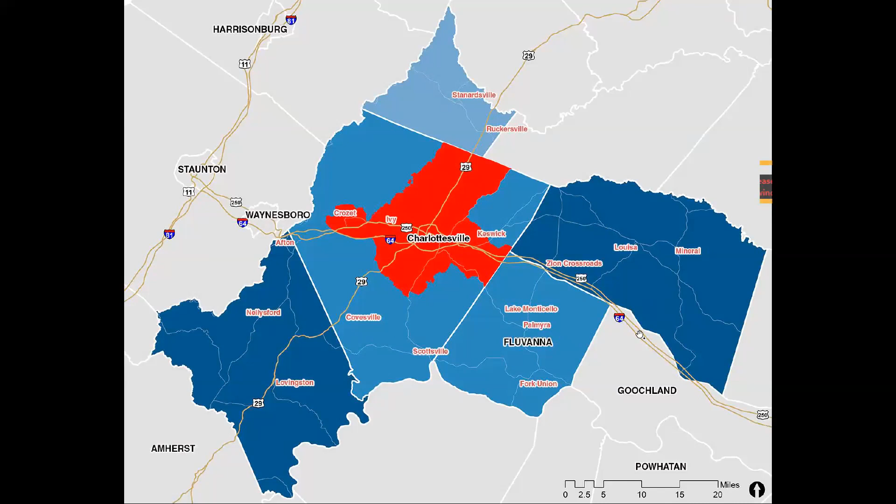All right, go ahead, next slide. Do you see it, Chuck? Not yet. There it is.

Okay, this is the first project. This is a resubmission from last year, our last round of Smart Scale. It's for the conversion of the interchange at Fontaine Avenue and 29 bypass to a divergent diamond interchange, which basically would allow for better operation of that interchange, and it would also accommodate the northbound left turn movement that's currently a yield condition at 64, which has caused a lot of recent crashes in recent years. It would allow that movement to be eliminated and routed through this interchange.

We're looking at this concept right now, and we may make some modifications to it. The district L&D and traffic engineering section are doing some additional work on this project, and we're going to try to reduce some of the costs so that it can be more competitive. It'll be slightly different than what you're seeing in the original concept, but the price is probably still going to be around the same, about $18 to $20 million.

Once we finalize the concept, we will validate and update the cost estimate to reflect the new cost.

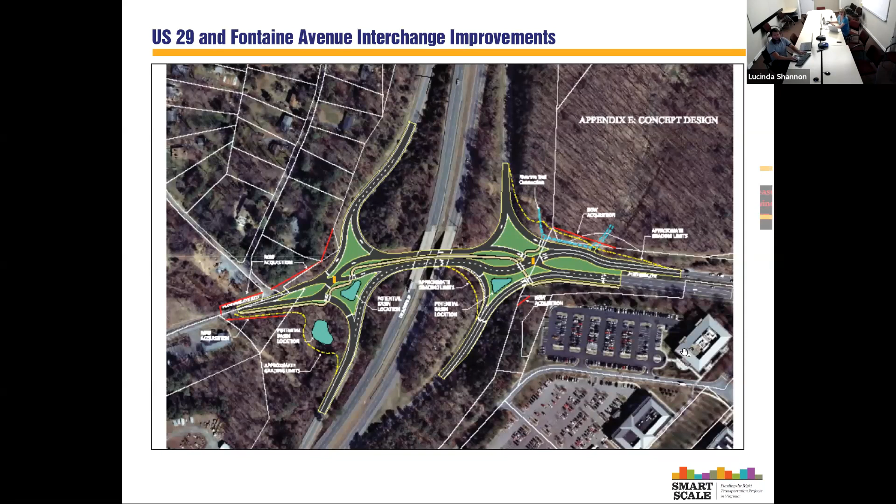Chuck: All right, one of the projects that was part of the Hydraulic 29 panel study was the Hillsdale Extended South project. We came up with some concepts, and this was one they wanted to see how well it would compete. It would extend Hillsdale from the current intersection at Hydraulic down to tie in with the 250 interchange, and it would relocate the westbound ramps to this connection point. It would also include some improvements on Holiday with the addition of an acceleration lane.

It would reconfigure the 29 lanes to allow for a right turn free-flow lane for traffic coming off of 250, basically making that right onto 29 without having to stop. It also provided some other connections to the back of Kroger's and to another property there. It did go through one parcel at the end of the street, Holiday on the north side, but we tried to keep the impacts to a minimum as much as possible.

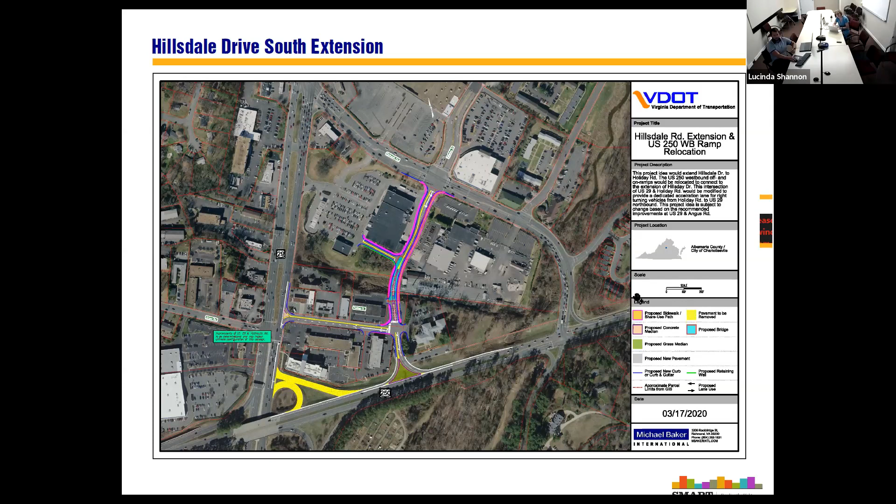Okay, the other side of Hillsdale, north of Hydraulic Road, has sharrows along the entire length. So this extension of Hillsdale needs to continue that theme. We need to have infrastructure for bicyclists along that extension, at least down to Holiday Drive, and probably a little farther—not all the way to the ramps, but just short of the ramps, I would say.

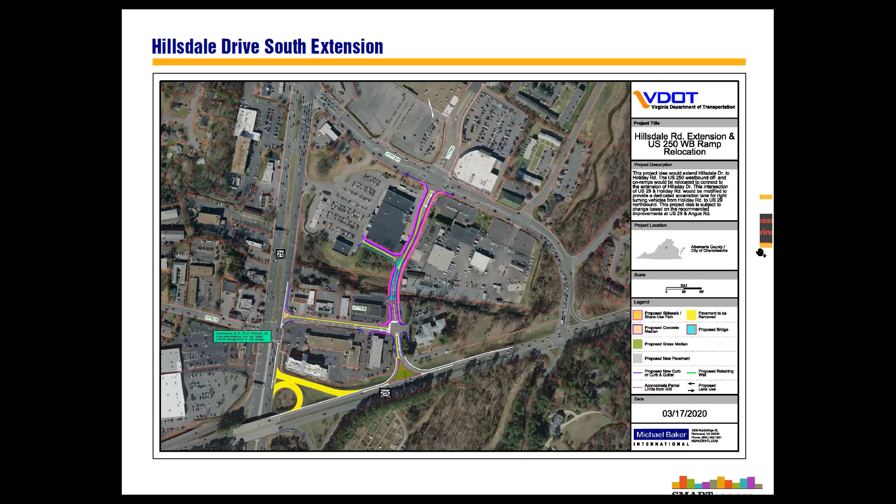Okay, I'm taking notes. I think from the road, Holiday North, we didn't actually show the sharrows, but we did show the pedestrian facilities. We'll definitely want a delimiter between where the limited access traffic starts and where the regular traffic ends, so we'll probably look at that intersection as that delimitation point. So instead of following the road further south from Holiday, you'd probably be on some sort of shared use path or other facility next to the roadway—not part of the roadway itself. Okay, thanks, Chuck. We're going to move on to the next project, the Hydraulic Road and US 29 project.

All right, this is the main project solution that we came up with for the projects submitted last round for the Hydraulic 29 Solutions project. It includes 5 different segments of improvements, and they're listed on the right.

The first one is the main intersection at Hydraulic. We were going to eliminate the left turns from Hydraulic Road onto 29, and those will be relocated either through the parallel facilities or through the roundabout. At Angus, we were looking at configuring that as a continuous green T, which would eliminate access from the hotel side to the intersection. They would still have a right in, right out, but they wouldn't be able to make the left out.

The crosswalks and pedestrian accommodations that are there now on the south side of the intersection would still work and still be part of the improvement. At Zan Road, we basically looked at that as a bike pedestrian crossing with some transit improvements, bus pullouts with transit stops, ADA ramps, and an overpass across 29 just north of Zan Road.

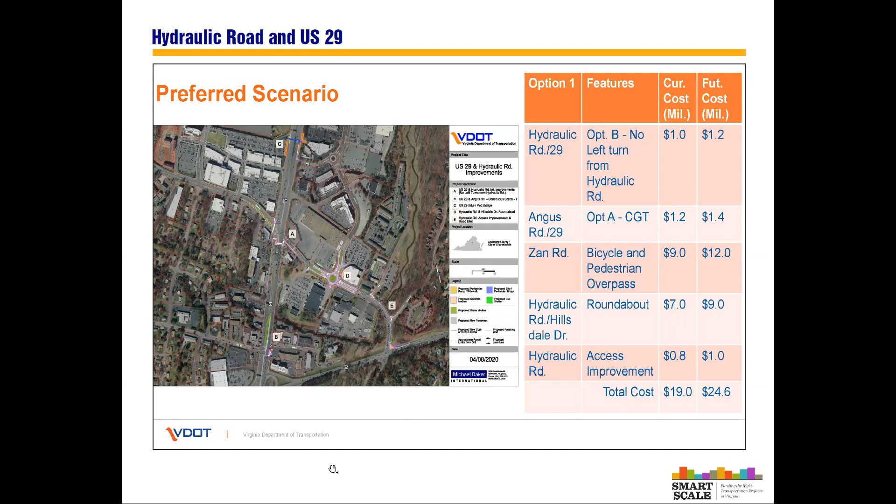Okay, thanks, Chuck. And we're going to move on to the next project, the 107 Park and Ride lot.

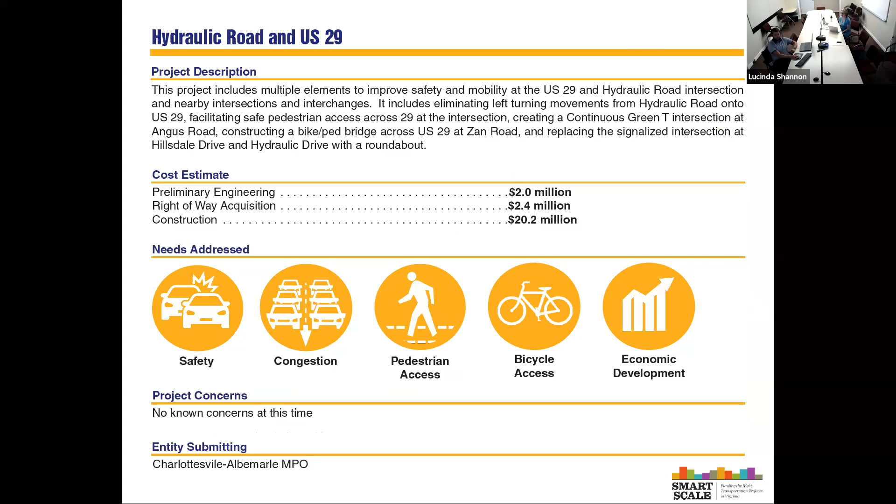This was an application from last round. It scored fairly well, but we weren't able to include the transit amenity — we had it in the concept, but we didn't have transit facilities, so we didn't get credit for that. Because we now have transit going to Crozet, and it actually goes near this location, we'll be able to get that credit for the application, so we feel it will score much better this round.

It's basically the same concept as last round. It has 2 handicap parking spaces as well as 25 regular spaces, a bus turnaround, and sidewalks connecting the parking lot to the bus pickup location, and it also includes a shelter. We're making some small modifications to the ramp, or the left turn lane, out on 250 to accommodate the additional traffic we'd expect to use this roadway.

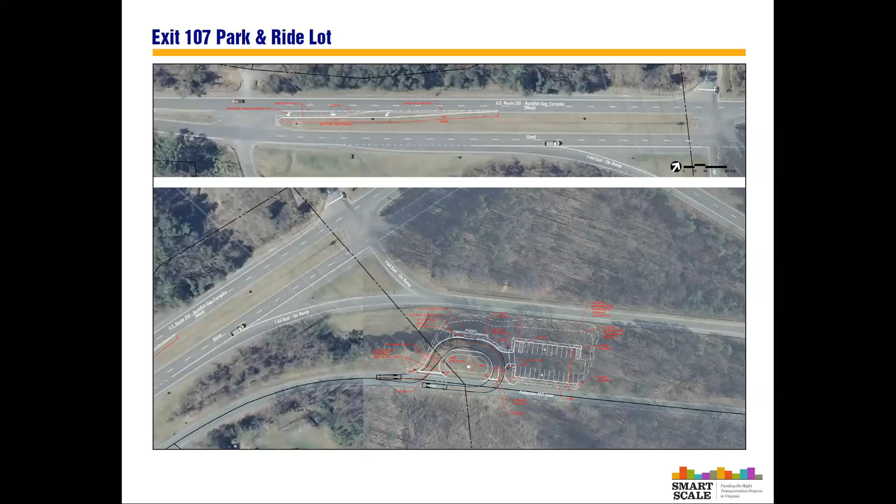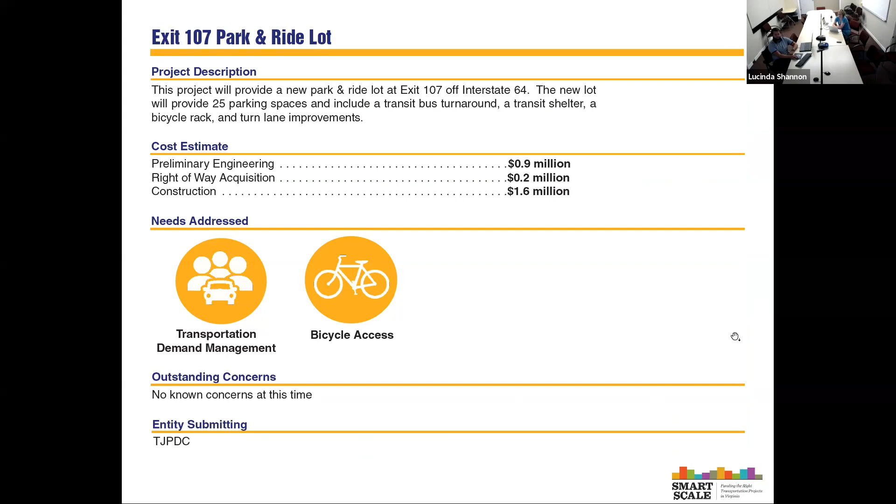Okay, I'm going to move on, and we can move on to the Route 29 shared use path.

This is another project that was submitted last round of Smart Scale. It's basically to build a 10-foot shared use path from Carrsbrook Drive all the way to Seminole Trail, along Seminole Trail all the way to Seminole Lane, which is in the northern shopping center right before you get to the Rivanna River Bridge. It's going to have one crossing at Seminole Lane, opposite the Hilton Heights connection, where you'll have the at-grade crossing, not of 29, but of Seminole Lane.

But that's the details of that project. It will connect, because a lot of the cyclists and such want to use that connection. There's no way to go north from Carrsbrook currently. You can get to Carrsbrook, but you can't get further north from there.

So we're hoping to extend this in the future, either by making improvements to the bridge to accommodate future extensions of this trail, to connect to the trail that's just north of the bridge on the Rivanna River on 29.

And Chuck, that leads into our question from Michael Gazert: will you be widening the sidewalk across the bridge? Not with this project.

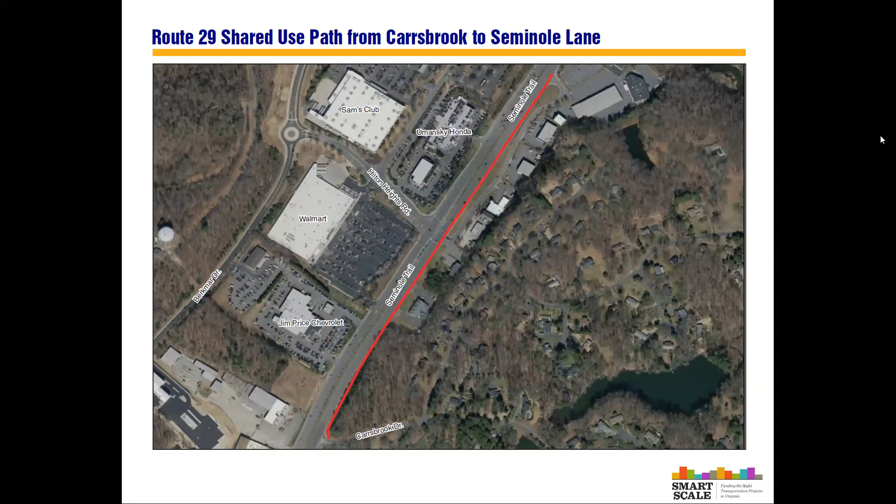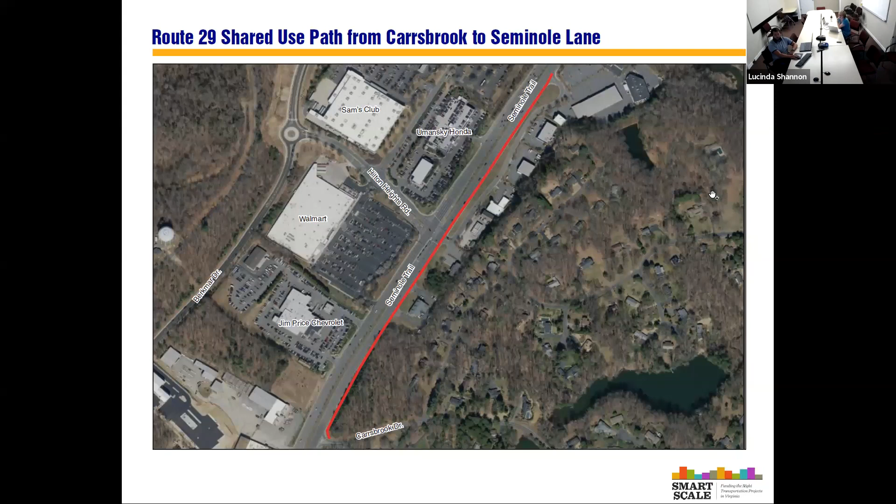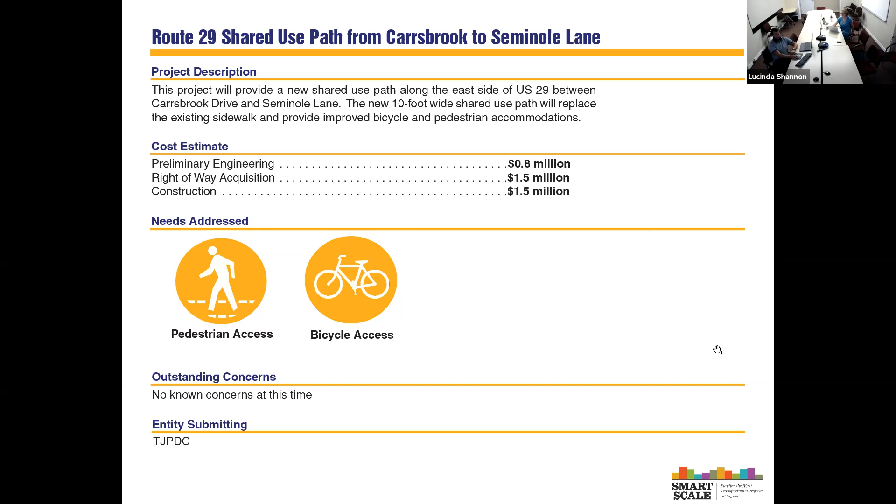Okay, that's kind of a comment, so we'll record that under the comments. And we're going to move on to the next project, which is the Route 29 Frays Mill Burnley Station intersection improvements.

This project was identified as a safety need due to the number of injury crashes that occur at this location. Last round of Smart Scale, two years ago, we submitted this project for funding and it wasn't selected. We were just evaluating it for submission a second round.

Basically what it does is take the existing 8-phase signal, 4-way intersection, and makes it a 2-phase signal with right turns and U-turns for the side street. It actually improves the level of service for all of the movements at the intersection and preserves the flow of traffic on 29 so that it can accommodate future traffic without having to go through an expensive widening project, which I don't know how we would fund.

So that's basically what this does. All of the crossovers are signalized for this project. When you come up to one of those approaches from Burnley Station, wanting to go straight through or make a left, you would stop when the light turns, make the right, get over in the left lane, and go up to the U-turn crossover, about 900 feet away. If you're familiar with the area, it's about halfway to where the Albemarle County sign is in the median. You would go there, wait for the light to trip, make the U-turn, and proceed south, either making the right onto Frays Mill or proceeding south toward Charlottesville.

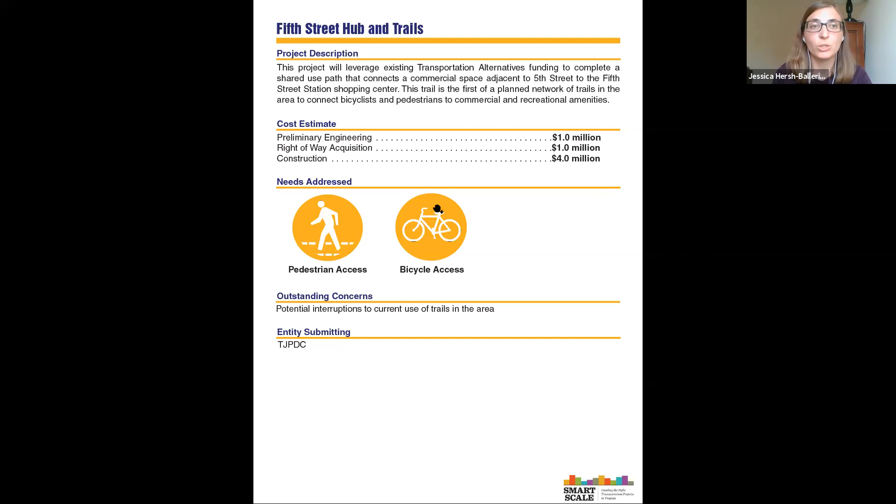So the path parallel to Biscuit Run Creek running under I-64 - I think there would be some sort of primitive connection with that existing trail, with the intention of potentially seeing that turned into a transportation-standard trail sometime in the future.

Chuck, did you have anything to add on that? Yeah, that was the intent, especially on the east side of Biscuit Run. There's the old roadway that runs down through there, and we're going to be crossing it, so that would act as the existing connection.

On the west side of Biscuit Run, where the old road comes out and the old bridge is there, you're going to have that connection back to the commercial area on the west side. So those connections will be there - they just won't be of the standard ADA compliant trail that this one would be.

In addition, especially with the switchbacks that Jessica was talking about, we'll probably have to do some small retaining walls and possibly include some handrails and other features to make it work and meet the requirements, because ADA holds you to a 5% grade for the whole length of the facility maximum. So we've got to meet those requirements.

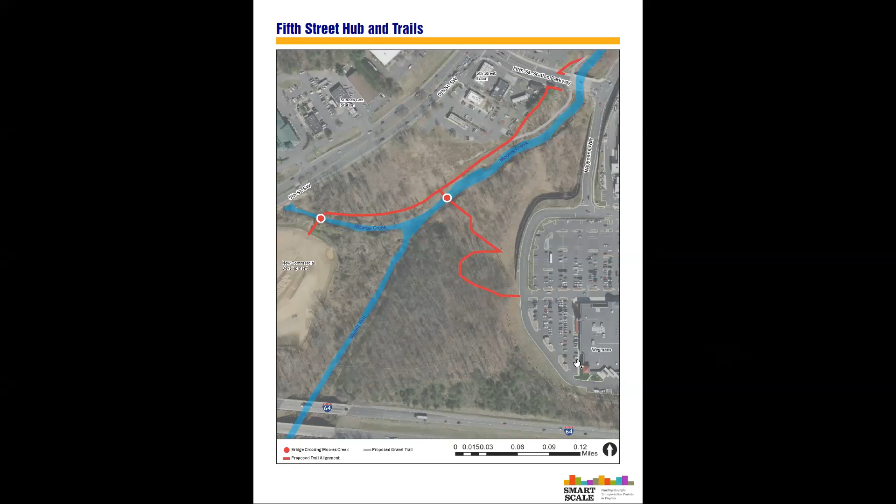There's some comments in the Q&A from Ann Malik: please separate the cost elements, especially the second bridge and the steep switchback trail. And another one from Ann Malik: are there already bike lanes? There are already bike lanes in the shopping center.

The only comment I'd like to add - there may be bike lanes in the existing shopping center, but I should mention that shared use paths are not a replacement for those. They're in addition - shared use paths appeal to a different variety of user, people of all ages and abilities, as opposed to a bike lane which might appeal to a narrower set. So this increases access for all types of people.

Another question: won't a mid-block crossing there create a huge conflict with cars in an area that is already very tight and congested?

Yes, that's a concern, and that's why there's these two - it almost looks like two separate paths that we've created here. There is concern from a lot of different people about that mid-block crossing, and that was the intention of creating this sort of switchback piece. It would give us an alternative to that, but still give people the access to the shopping at Fifth Street Station that they're looking for.

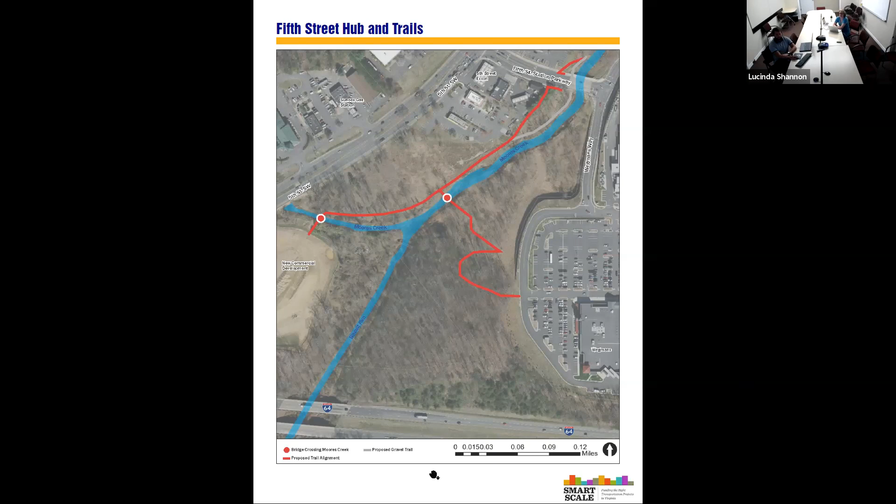We're almost at the end of our time tonight, but we're going to stay a little bit longer to cover the last project, which is the Route 20 shared use path.

This is the initial design for our Route 20 shared use path. It begins at Monticello and Druid Avenue, which is where the City of Charlottesville's bike lanes and sidewalks will end. This project will extend those bike lanes and sidewalks from there down to Quarry Road.

There will be some sort of crossing that allows people to access the shared use path, which would be built in the median. The shared use path would be 10 feet wide per transportation standards for a bidirectional shared use path. Ideally, the path will have an 8-foot buffer or some sort of vertical separating element to separate the shared use path from the motor vehicle travel lane.

The shared use path would end at Dairy Barn Road, where there would be some adjustments to the existing signalized crossing to allow for access to the west to PVCC and to the east to the Saunders Monticello trailhead.

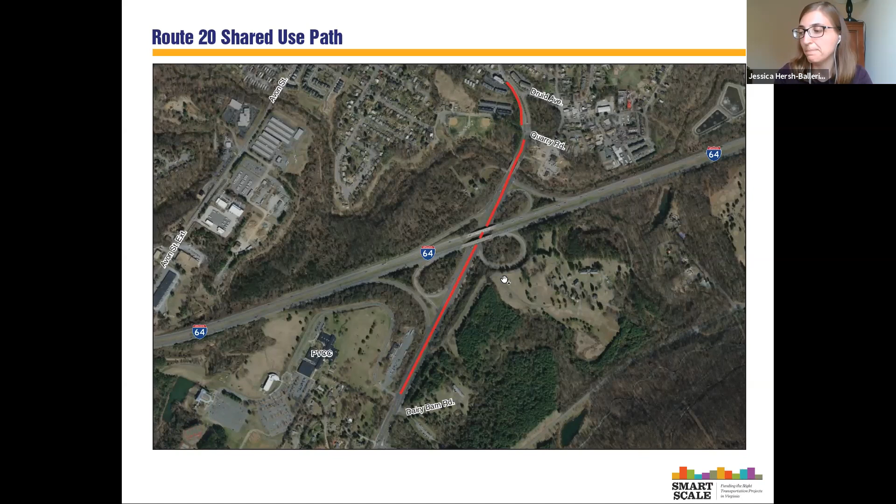The cost estimates are still very preliminary, but the purpose of this project was to address pedestrian and bicycle access to educational and recreational opportunities.

Outstanding concerns: we've had quite a few communications from some very passionate folks about the memorial trees planted in the Route 20 median and how this project would impact them.

I really respect your passion and I really respect the project. As we move forward with this particular project, we want to include someone from the Tree Commission in our conversations—someone with that technical, scientific background to help us answer questions about how different project components could impact the trees and make sure we keep them healthy.

I think we can end up at a very mutually beneficial solution, because a shared use path is just made better by plenty of trees that provide shade and get at that vertical element of separation from motor vehicle traffic, making it a much more pleasant experience so people can have this access by biking and walking.

Thanks, Jessica. We're going to open it up to questions.